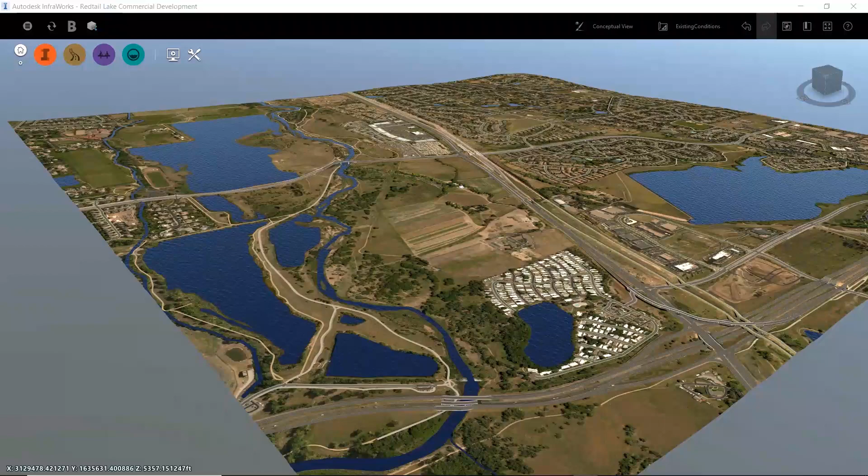Every project starts with a concept. Being able to visualize the project concept in a 3D contextual environment allows all stakeholders to understand the project from the very beginning. It all starts in InfraWorks by using Model Builder to define the site and begin the data aggregation process.

Understanding the existing conditions of the site is key. Traditional methods of capturing existing conditions can be time consuming, but by using the drone to design workflow, which includes Autodesk ReCap, you can collect existing conditions data faster while maintaining accuracy.

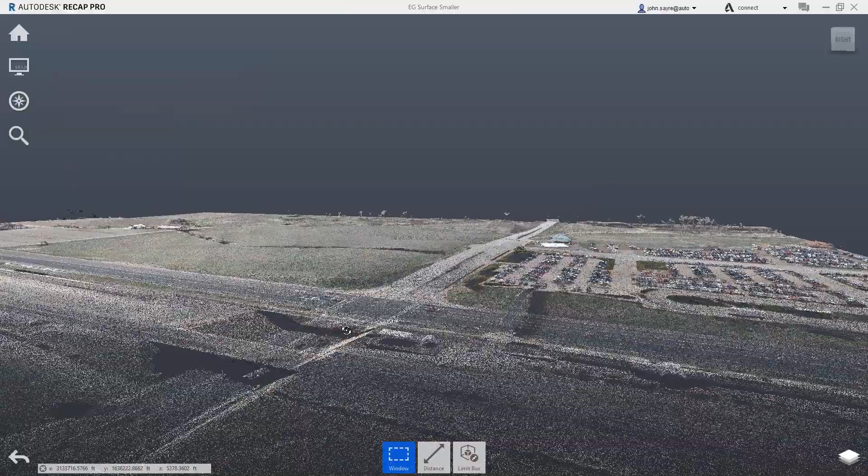This workflow allows you to take advantage of real-time, up-to-date imagery and existing ground topography that has been generated from the point cloud. This data is key when making engineering decisions for the project.

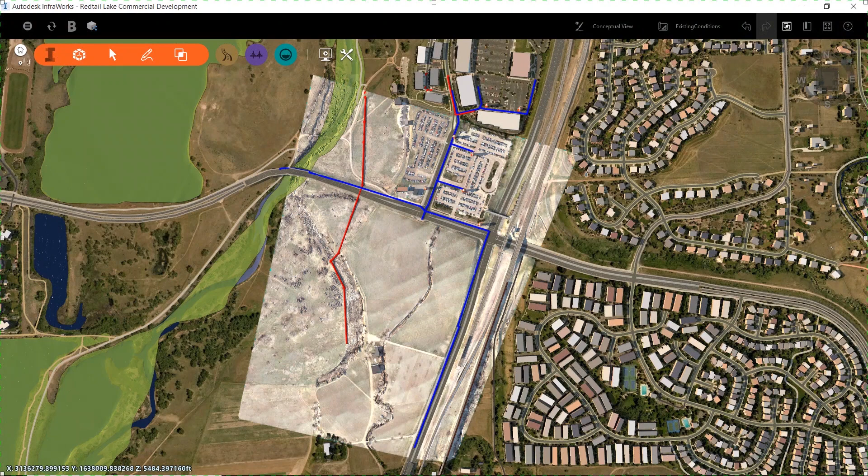To further enrich our context model, you can take advantage of the Autodesk connector for ArcGIS. This allows us to further populate our model with rich GIS data. This data could represent existing utility locations, FEMA floodplain data, and soils data as examples of information that will help us to make design decisions in the preliminary stages of the project.

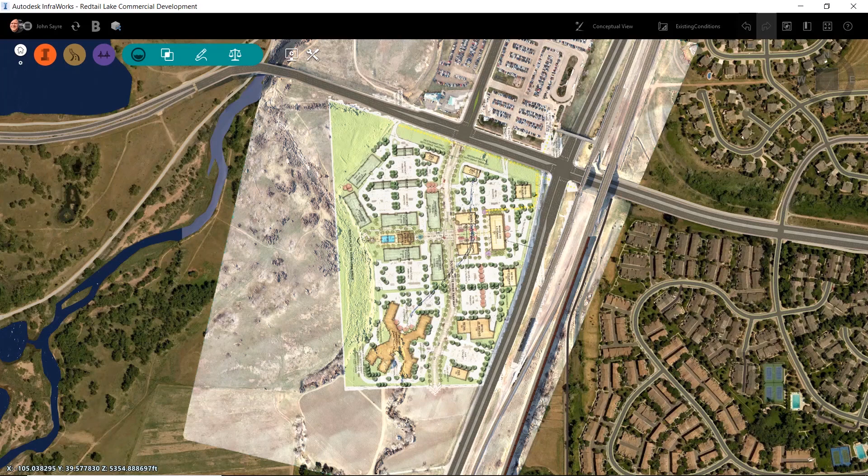Focusing on preliminary design and with our context model populated with rich GIS data, we are ready to run specific types of analysis, such as watershed analysis, which will help to better understand stormwater management for our project.

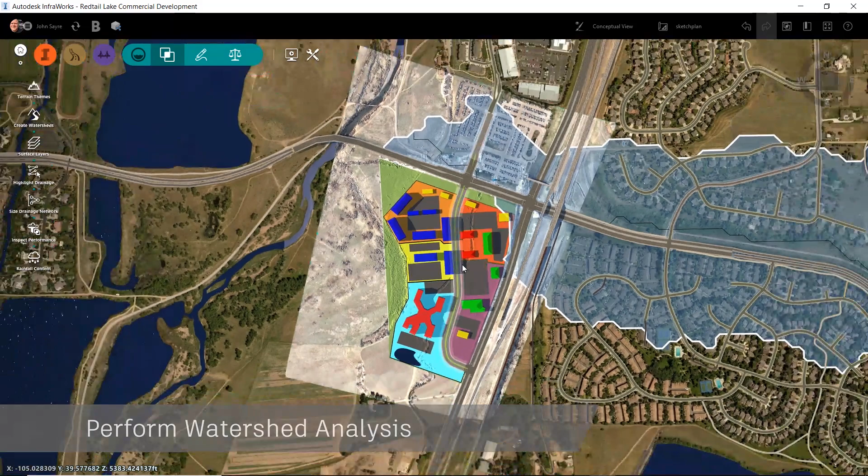Laying out design alternatives, there are times you will need to verify your GIS data. For example, while in the field, you can ensure utility locations and collect additional data for utilities that might have been missed. You can use the Collector for ArcGIS app to real-time locate missing structures on site and then populate your model with a simple refresh of the data. This allows you to make faster, more accurate design decisions and resolve issues this new data might create.

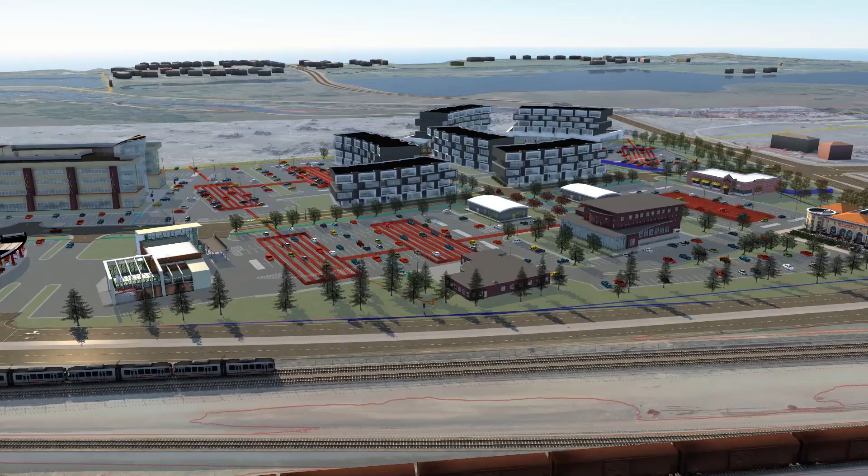Creating a context model with accurate existing conditions data coupled with rich GIS data is key for project success. The data in this model will be used from the sketch plan stage of the project to preliminary design and will ultimately play a huge role in the final layout and design of your project.